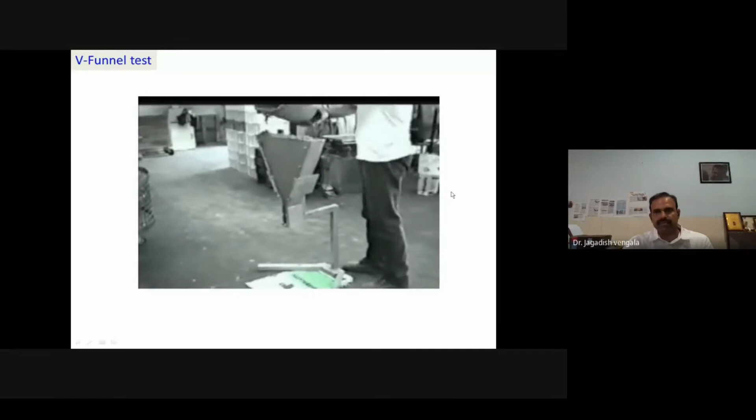So you fill the concrete with the V funnel, and you remove the bottom gate and measure the time, how much time it took. It should be 8 to 12 seconds. That's what you measure here in V funnel.

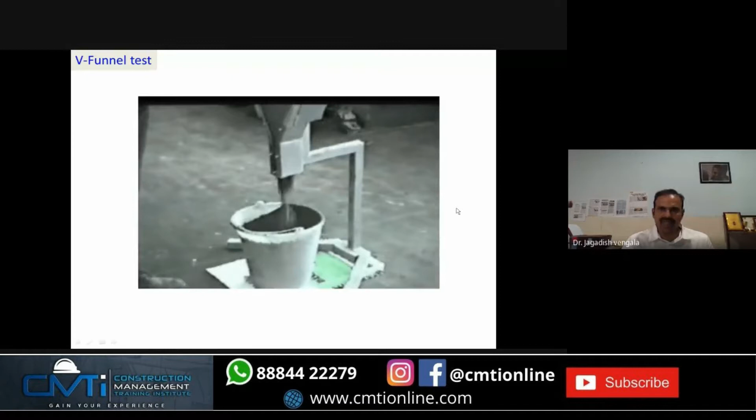Next is passing ability test using L box test. There are two boxes, one is vertical box and one is horizontal box. You measure the passing ability, you fill the vertical box with the SCC and then lift the gate, and it has to pass through the vertical reinforcement gate that is placed at the center of the vertical and horizontal box.

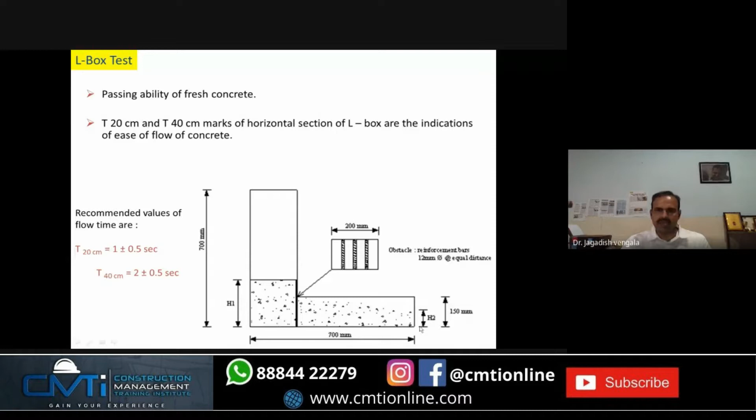It has to flow through the reinforcement, and you measure various things like time taken to reach 200 mm, time taken to reach 400 mm, and also the height difference H2 by H1, which gives the blocking ratio. So you fill the vertical box, lift the gate, and then it has to pass through the reinforcement.

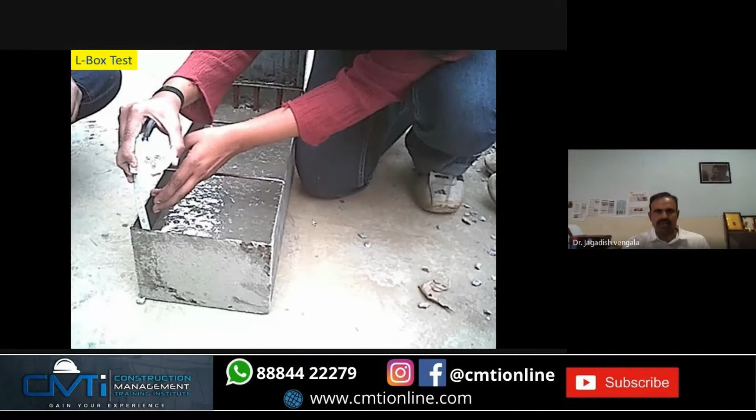There is an indication at 200 mm and 400 mm. You measure the times also, and also you measure the height difference between both the ends, H1 and H2. H2 by H1 we call it as a blocking ratio, the height differences, and it should be more than or equal to 0.8.

What does that mean? The height difference, it should generally be flat. Otherwise, the difference should be less. If it is less than 0.8, what does that mean? It is taking more time, or if the mix is stiff, it cannot reach the other end. So many things, and otherwise there is a blocking at the gate while passing through the reinforcement.

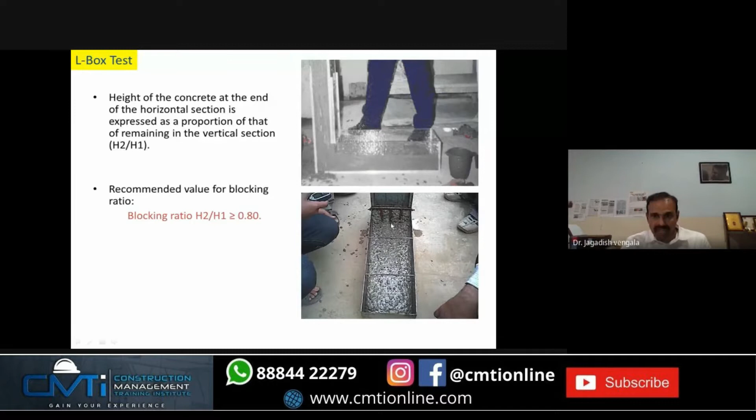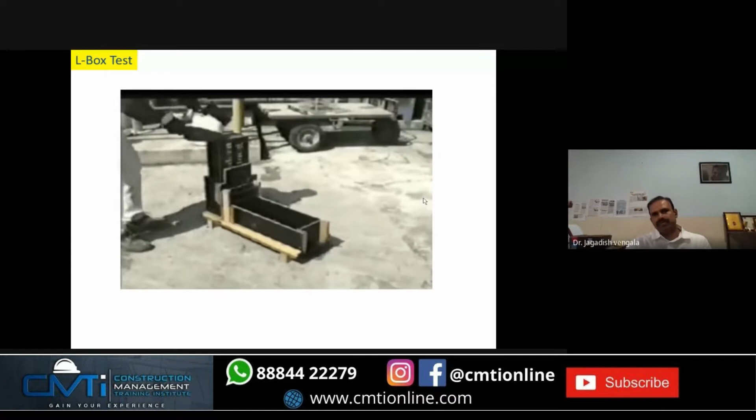So you're filling the vertical box, and there you're lifting the gate, and then you're measuring both ends, that end and this end. So the height difference H2 by H1 will give you the blocking ratio. It should be more than 0.8.

That's what. Next is U-box test. U-box test also, there is a U-box. So you have two channels, okay, two chambers, I can say, two limbs. And then one of the chambers, you fill it with concrete, and again, similar to L-box gate, you place the gate and you lift the gate. It has to pass through the reinforcement, and it has to come to the other end of the U-box.

The height difference between the first limb and second limb should be less than 30 mm. That means 3 centimeters.

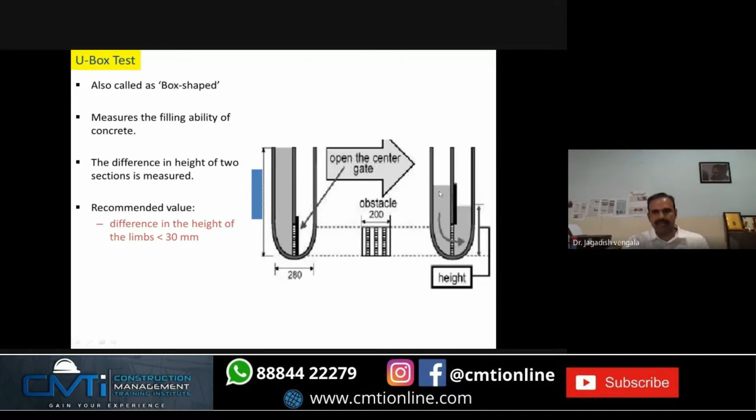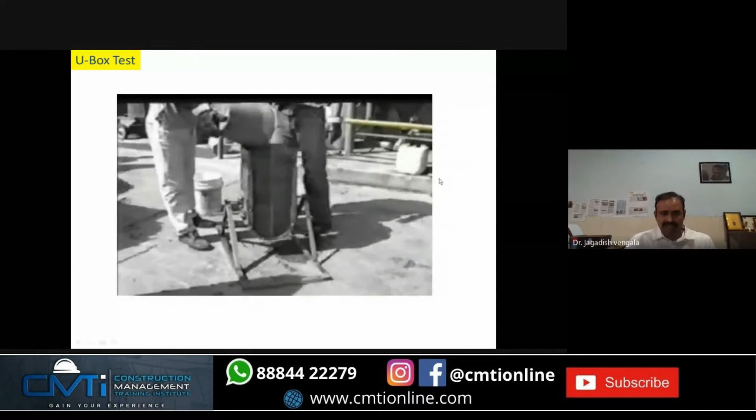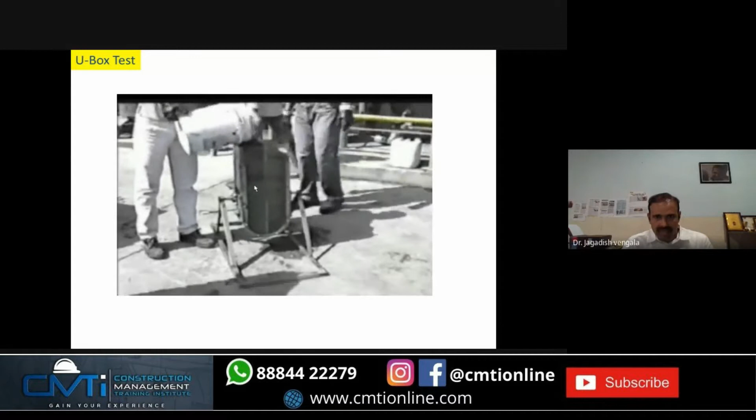These are the U-box dimensions. You can see one of the chambers is filling. You can see the concrete is rising. Concrete has come up to this. You can, by cursor, you can see, and then it slowly. So it has come up to this.

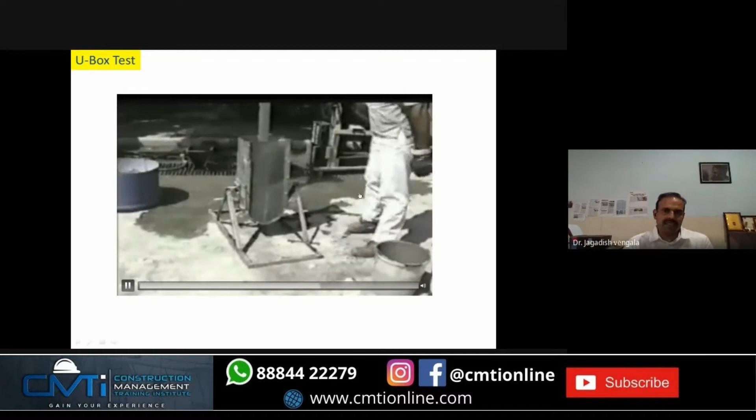Once it is completely poured in one side of the box, you will lift the middle gate, and then it comes to the other limb. So you will measure the height difference, this side and this side. This should be less than 3 centimeters or 30 mm. That is what you do.

And then there is a simple other test which is called J-ring test. J-ring test is a combination of, you have a ring, and then inside the ring you place the Abrams cone, and then you pour the concrete into Abrams cone. You lift the Abrams cone, and then the concrete flows through the J-ring.

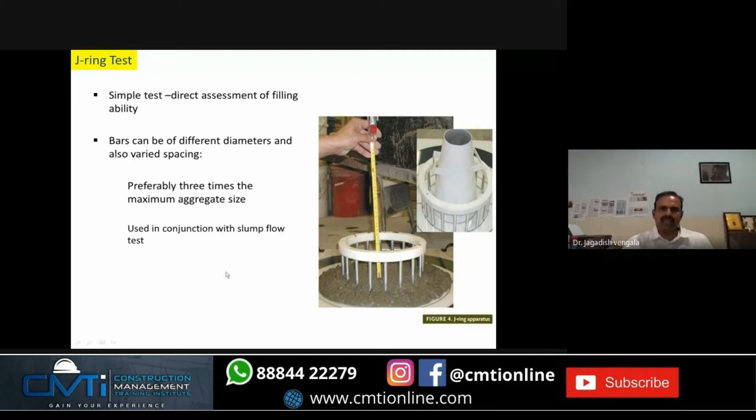And then what you measure is the height difference between outside and inside ring. It should be less than 10 mm. That means it should flow freely even after passing through reinforcement. So here also you measure the passing ability.

So you have a J-ring, and then you place the slump cone, fill the slump cone with self-compacting concrete, lift the cone, and then it has to pass through the J-ring. And you measure the inside height of the concrete and outside height. This should be less than 10 mm.

There is also fill box test. Initially, when we started, like in 2001, we actually fabricated one fill box and did the experiments. So here also there is a complex structure. If we have the fill box obstacles of 20 mm dia, and then you pour the concrete on one side, and it has to flow to the other end.

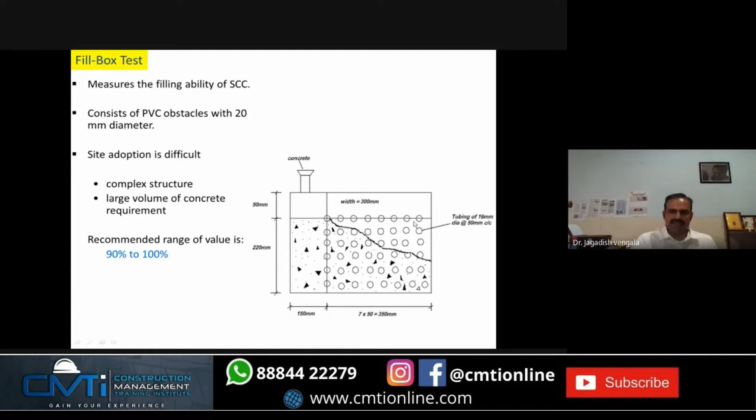You measure the filling area. The filling area should be 90 to 100%. There should not be any gap. That means it has to completely fill. So you can see here the experiment.

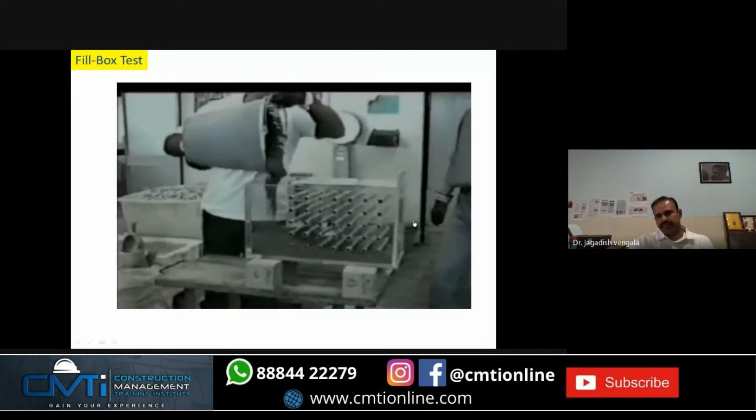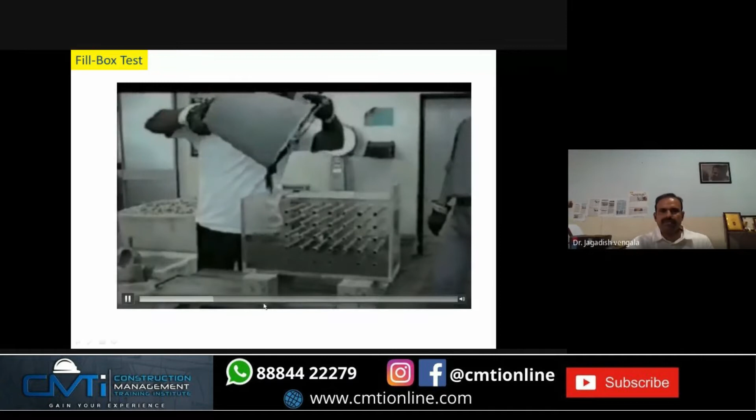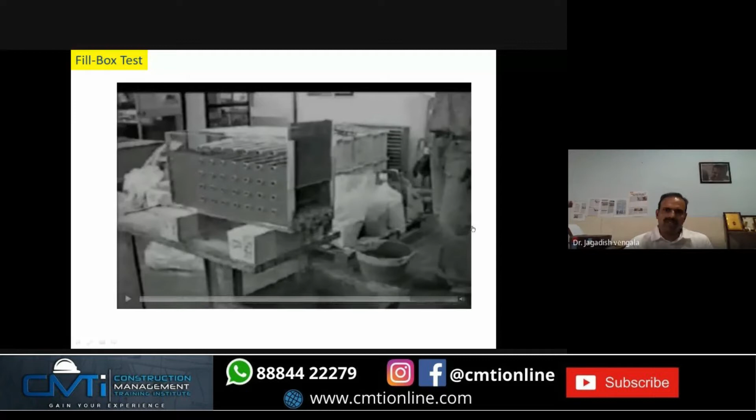So basically you're flowing, it is filling, almost 95% it is filling. What happens if your mix is not good, it gets blocked at the top, and then at the other end it will not come out. So this is what you measure - what we call filling, the filling ability.

The last test is called screen stability. This is a very simple test. You take 10 liters of concrete, keep it in a bucket for 15 minutes. Then you take the top 5 liters of the concrete and pour it through a 4.75 mm sieve, and sieve it. After 2 minutes, what happens is only the mortar passes through the 4.75 mm sieve, and you have the aggregate on your sieve. So you weigh the mortar sample. The percentage of mortar to the original concrete gives you the screen stability.

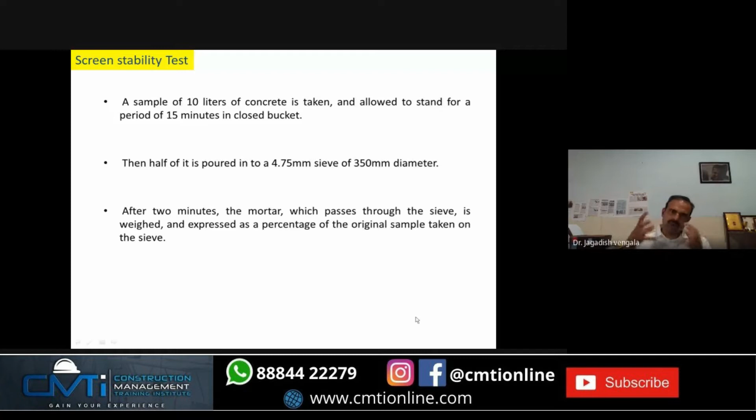What does that mean? If it is good concrete, when you keep it for 15 minutes, the aggregate should remain on the top layer. If it is not good concrete, all the coarse aggregate will settle down at the bottom of the bucket. So when you pick the top 5 liters, you'll have more mortar. That should not happen.

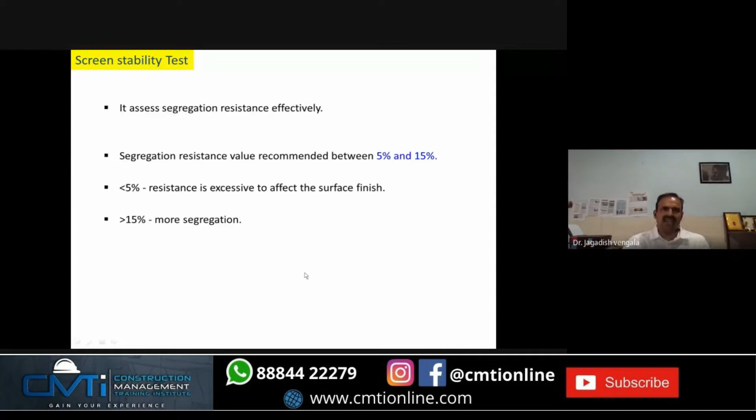So when you measure, the segregation resistance recommended values are between 5 to 15%. It should be less than 5% if it has excess resistance. More than 15% means more segregation. That's what the test tells you.

When you sum up all these tests: slump flow 600 to 800, T50 2 to 5 seconds, J-ring less than 10 mm, V-funnel 3 to 12 seconds, V-funnel T5 plus 3 seconds, L-box blocking ratio 0.8 to 1, U-box height difference less than 30 mm, fill box should fill 90 to 100%, and GTM screen stability test between 5 to 15%.

How can you do all the tests? For acceptance of SCC, you can do at least 3 combinations of tests. The Japanese combination: slump flow, V-funnel, U-box. Sweden: slump flow and L-box. Europeans do J-ring and U-box. And slump flow, either U-box or L-box, plus V-funnel 5 minutes. This we found better, based on our experiments.

I'll quickly run through because I have another 15-20 minutes, maybe 15 minutes. I'll quickly run through - a lot of things are there I wanted to share.

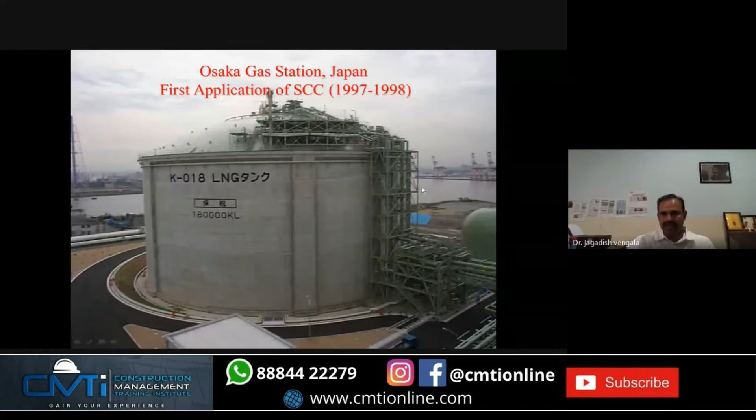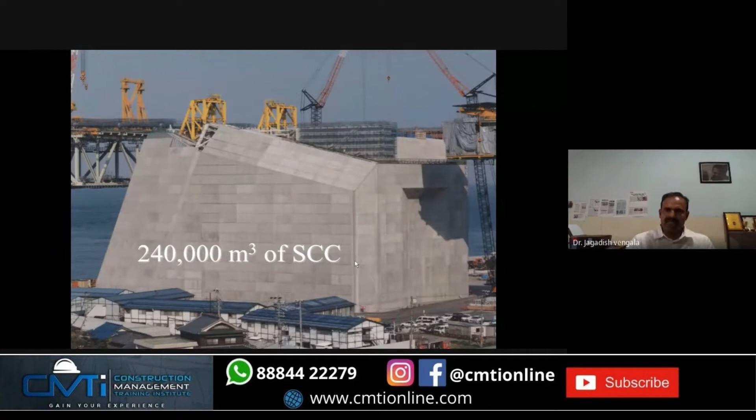This is the Akashi Kaikyo Strait Bridge, opened in 1998, connecting two islands of Japan. As part of my research work, I visited Japan in 2009 for one of the world's largest earthquake tests on a shake table. This is one of the piers on one side of the island. Here they poured 240,000 cubic meters of completely SCC. These are my pictures from when I visited in 2009 - I made a point to visit this place, along with my Japanese and US friends. This is the Akashi Kaikyo Strait Bridge.

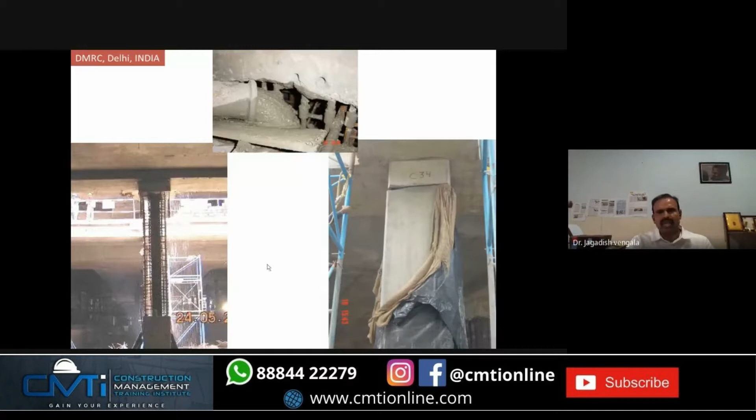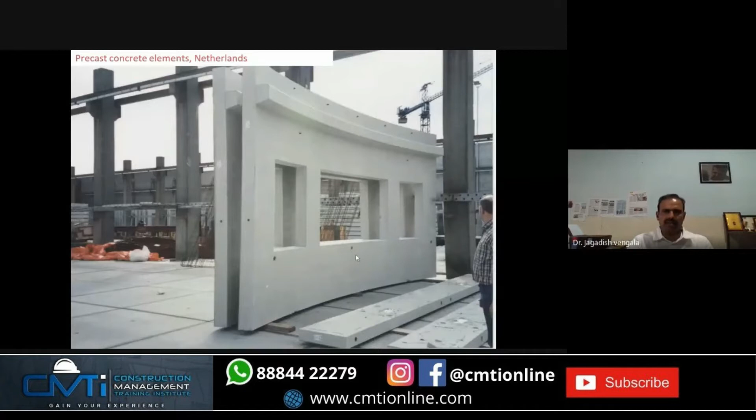In Netherlands, some precast concrete elements show a very interesting application. Concrete is poured, and once it gets cured, these elements are lifted and you can shift them to some other place. These are precast concrete elements made using self-compacting concrete.

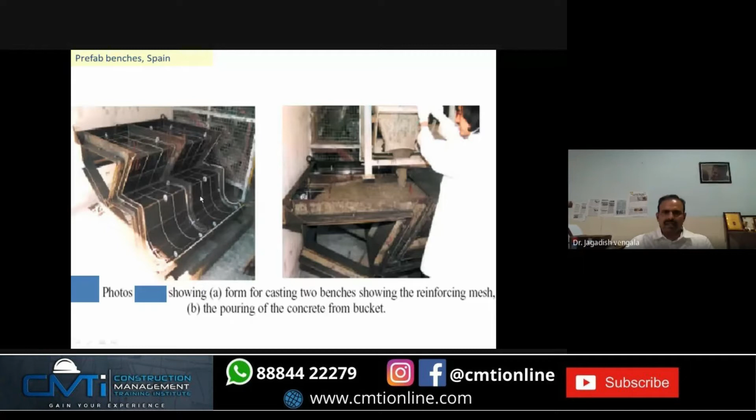This is a very interesting application in Spain by Ravindra Gettu from IIT Chennai. When he was at the University of Catalonia, Spain, he made some precast benches, some of the applications. I tried one myself, and at the end I'll tell you about one of my BTech students' project experience.

Coming to the mix design, I'll give you a small glimpse quickly, running through two methods. One is the method we developed, and the other is the Japanese method suggested by Okamura et al. in 1993, the first method that came from the University of Tokyo, Japan.

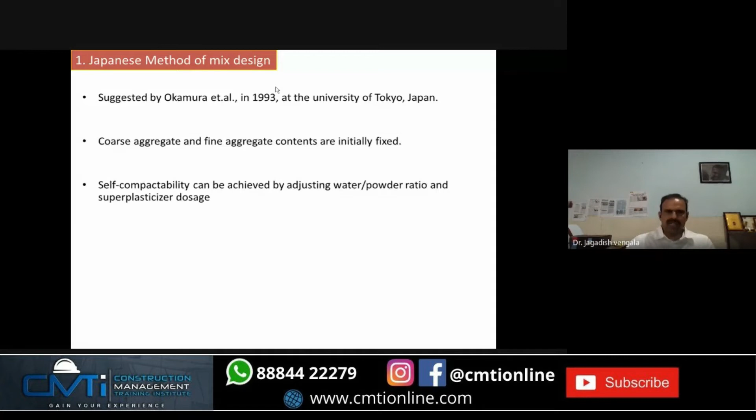In this method, you first fix the coarse and fine aggregates. By adjusting the water to powder ratio and the superplasticizer dosage, you achieve self-compactability.

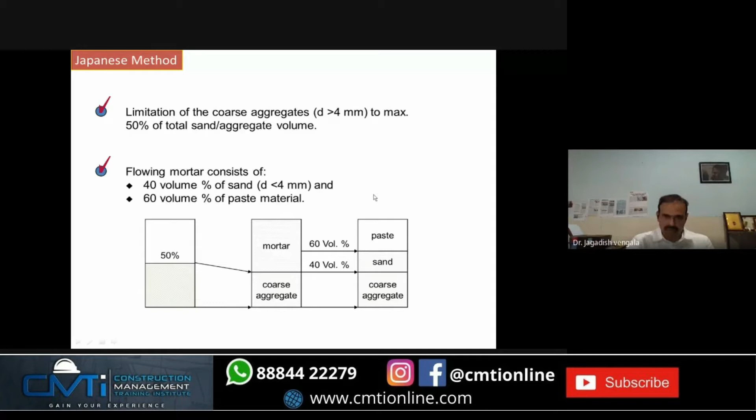So in this method, you decide the air content, which depends on factors like 2% or 1%, and then you fix the coarse aggregate at around 50 to 60%.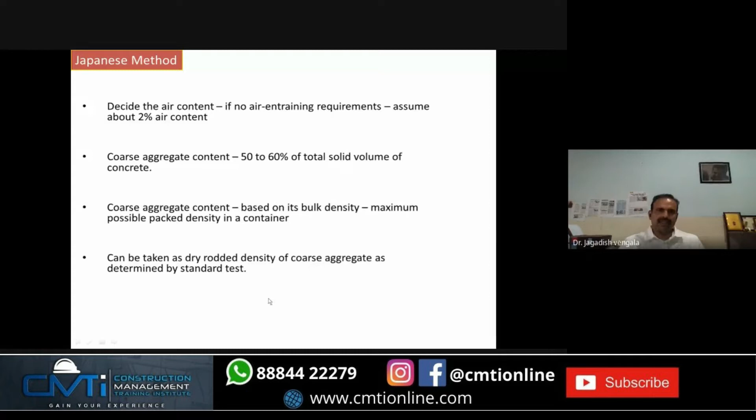You measure the coarse aggregate bulk density and the dry rodded density. This is how we measure the dry rodded density of coarse aggregate: place it in 3 layers, 25 strokes each layer. That gives you the dry rodded packed density of the coarse aggregate, which you use for calculations.

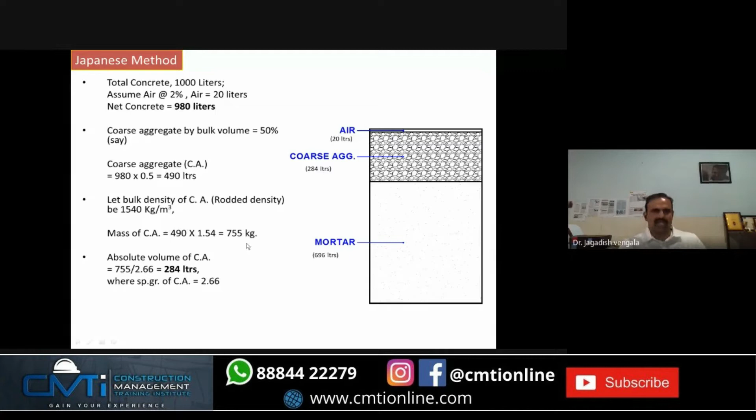For example, if you take 1,000 liters of concrete and assume 2% is air, you remove 20 liters, leaving 980 liters to design. If you assume 50% as coarse aggregate, that's 490 liters of the 980. Multiplying by bulk density gives you the mass, and from there you can calculate the absolute volume.

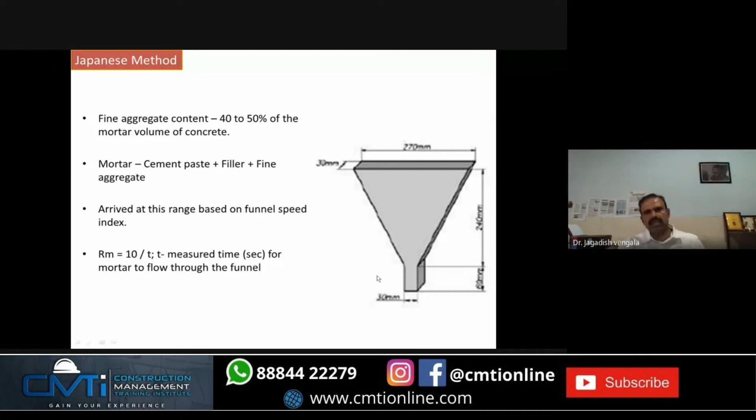For fine aggregate, using the small V-funnel, you actually get the fine aggregate content. This is the small V-funnel, and we do mortar trials to get the required mortar quantity.

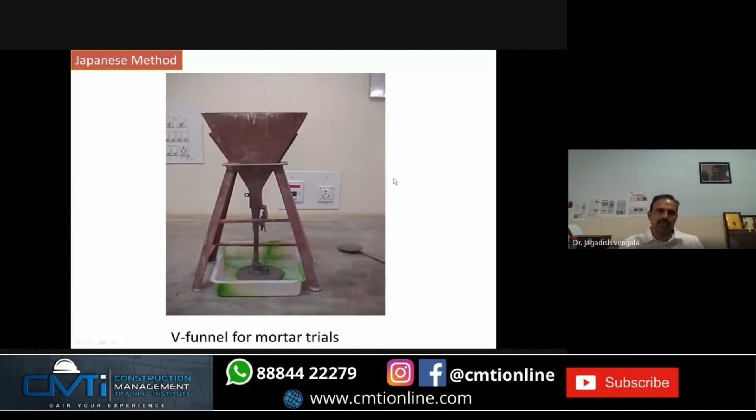So if the volume of coarse aggregate is, say, 284, you deduct that from 980, then take 40% as fine aggregate. That's basically how the method works. I'm not giving too much importance here because this is the complete mix design part of it.

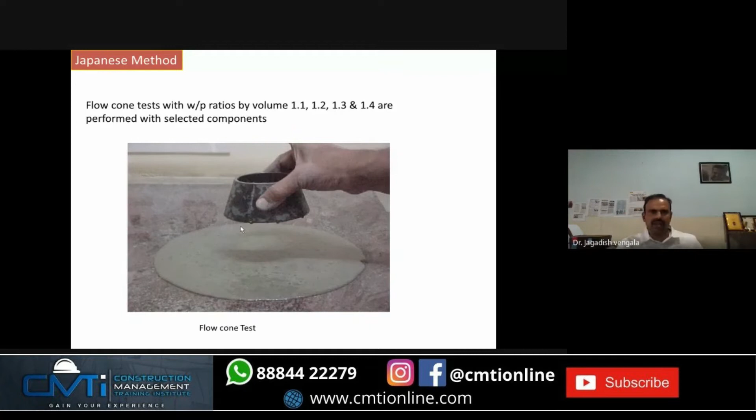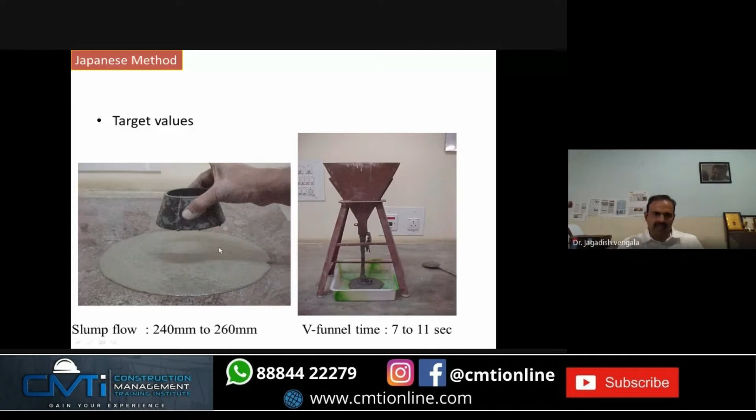Using the flow test, you measure the water to powder ratio needed, and based on that you decide the water powder ratio. Based on the V-funnel and flow cone tests, you decide the mortar proportion. Then superplasticizer is added, and you run the regular slump flow and other tests for concrete. I'm not giving much detail since it's a detailed explanation of the mix design—I've just given a glimpse of the Japanese method.

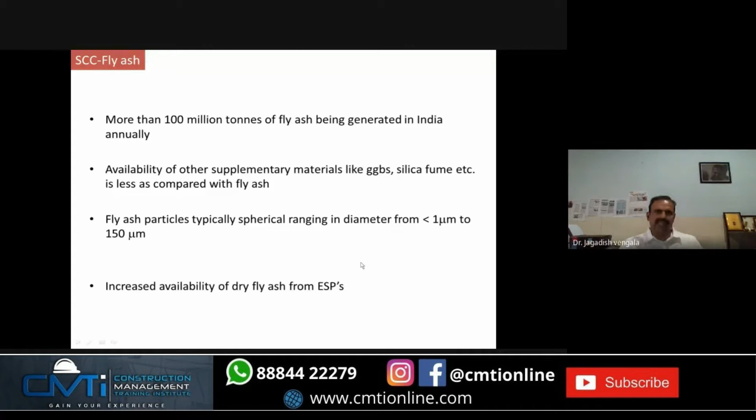Now I'll take up one more topic: how do you make SCC using fly ash as the cementitious material? We know that large amounts of fly ash are generated from thermal power plants, and fly ash particles are spherical in nature with a smooth, glassy surface, giving a ball bearing effect.

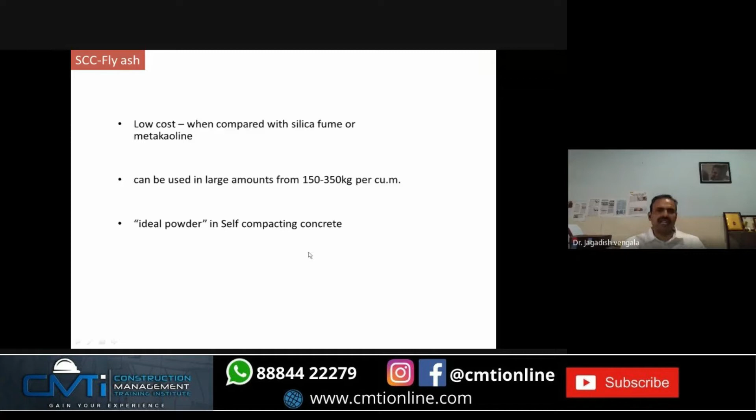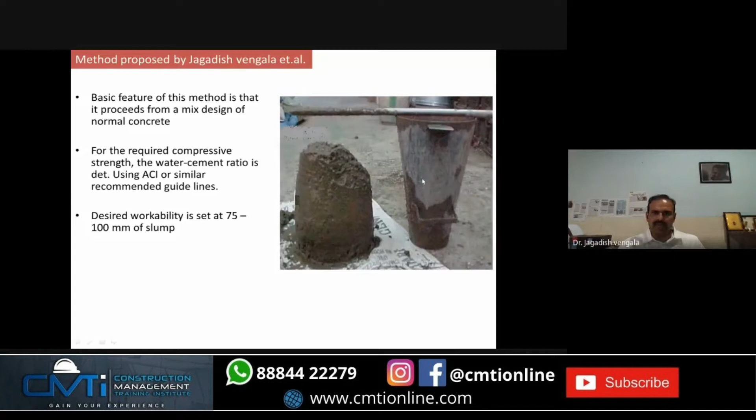In my method, like a normal mix design, once you achieve a workability of 75 to 100 for normal concrete, since normal concrete has more coarse aggregate, you replace the coarse aggregate using fly ash in various percentages—5, 10, 15—and slowly achieve self-compacting concrete. Replacing coarse aggregate with fly ash or other cementitious material gives flow to the concrete.

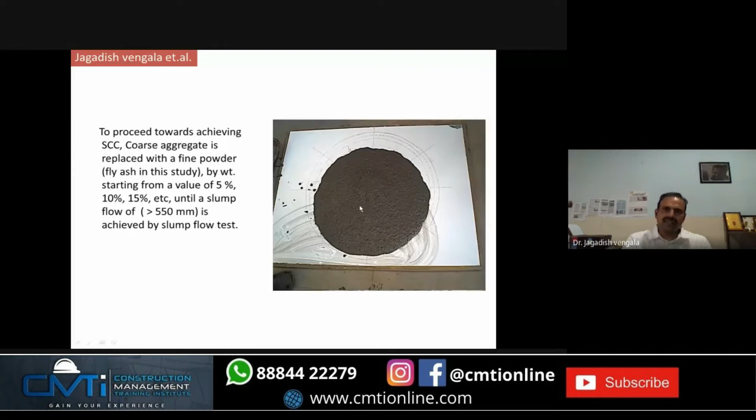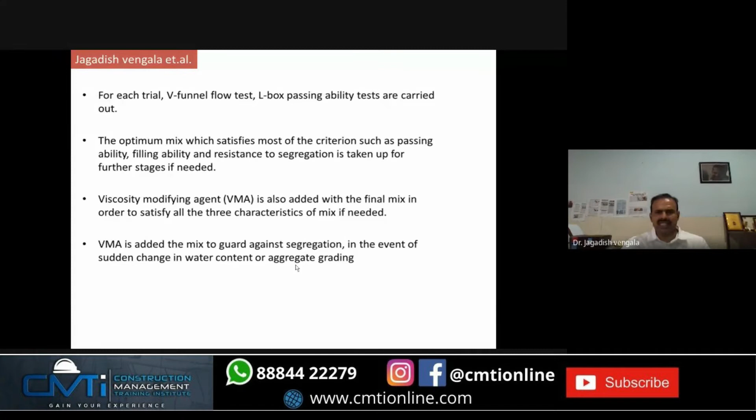At the same time, you have to conduct other tests like V-funnel, L-box, and others. VMA actually guards against segregation, since we usually observe changes in water content due to aggregate moisture and other problems, including grading issues.

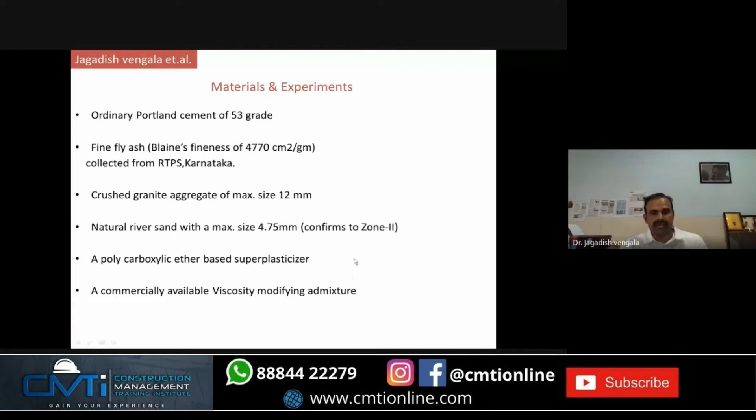For our experiments in 2001, we used OPC along with fly ash collected from Raichur Thermal Power Station, 12mm aggregates, and natural river sand. At that time it was natural river sand, though now sites use crushed rock fines or other alternatives. We used PCE-based superplasticizer and a VMA. So these are the mixes you can see here.

Very interesting study, why fly ash. We have actually measured 270-day strength also, that means after 9 months, we measured the fly ash contribution to the 28 days to 270 days strength.

You can see here for a replacement of 37% fly ash, comparing normal concrete to the 270 days normal concrete, there is an increase of 90 MPa. If 55 is your 28 days strength, 90 MPa is at 270 days. That's the long-term contribution of fly ash to long-term strength concrete.

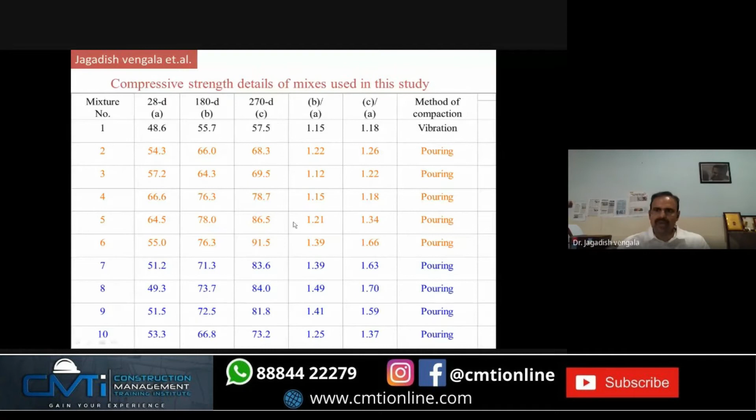So a very interesting point to note is when you're pouring, when you make the mix, you should not vibrate. Even if you're doing trials at your college, when pouring the concrete, you just have to pour. You need not vibrate because it is SCC.

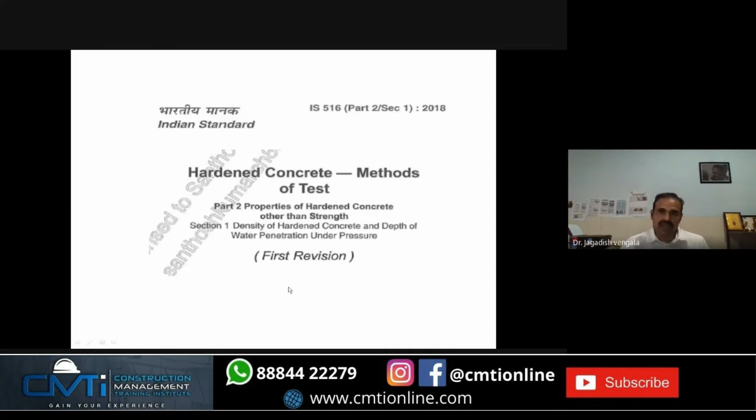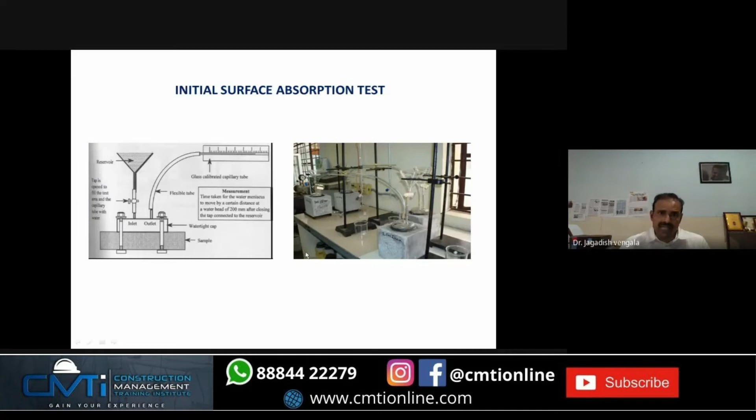Hardened properties, yes, it gives almost equal properties to normal concrete. Very interesting, IS 516 2018 has added new tests other than the strength tests: water penetration test, initial surface absorption test, a very important test, and RCPT test. These are the three very, very important tests when making SCC.

SCC is usually made for tall structures and other applications, particularly high strength applications also. When making these, these three tests are mandatory, as mandated by IS 16700 2017, criteria for structural safety of tall concrete buildings.

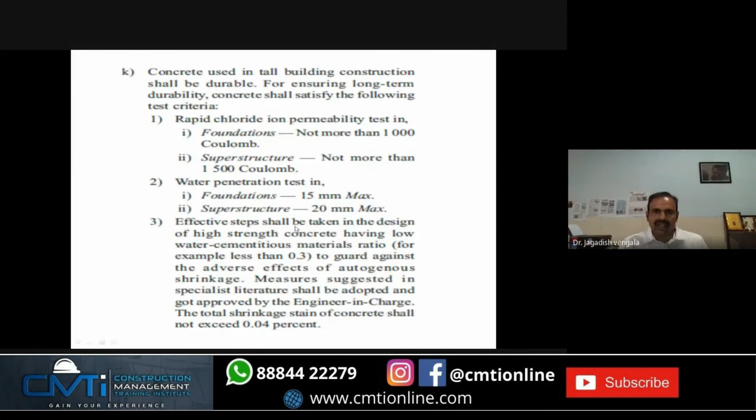When making concrete for these buildings, the rapid chloride RCPT value should not be more than 1000 coulombs for foundation, and not more than 1500 for superstructure. Water penetration test maximum is 15 mm for foundation, 20 mm for superstructure, and shrinkage strain value and other values are given in this particular code.

Here I would like to show some of the values. As per ASTM, more than 4000 is high chloride permeability, and low chloride permeability is 1000 to 2000.

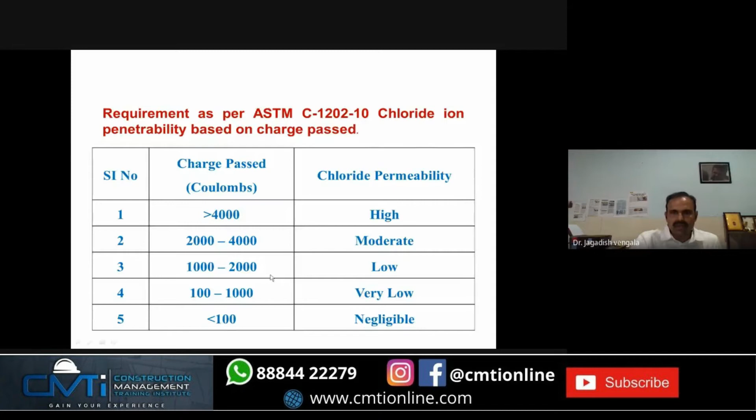Coming to the cementitious materials, how much do we have to add? This recent IS 10262 2019 gives the percentage of cementitious materials. Earlier, there was no mention of adding cementitious materials to the concrete.

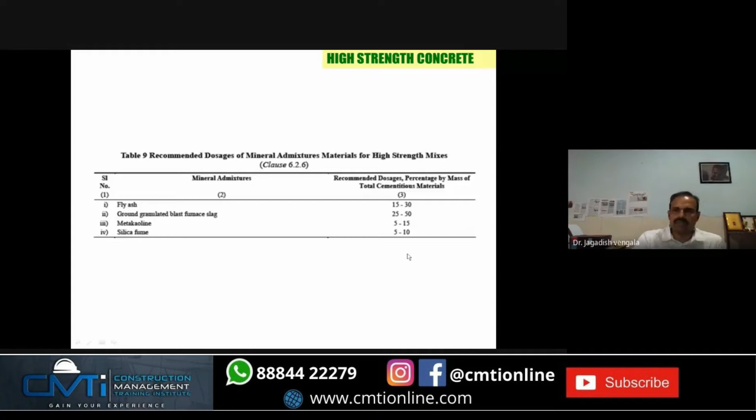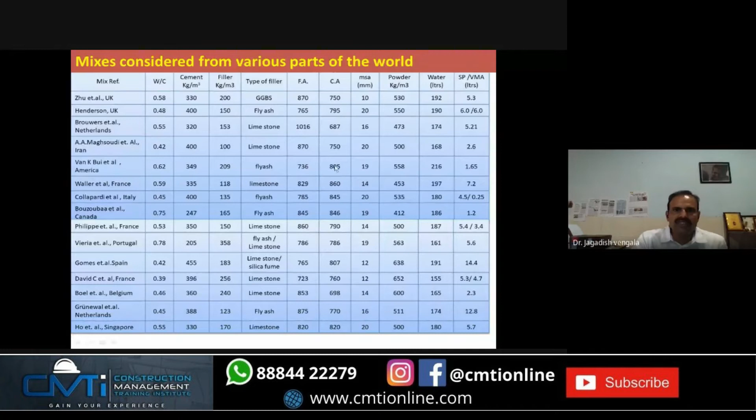Coming almost to the end of my presentation, I would like to give you the importance of volume fractions, particularly in self-compacting concrete. When we considered various mixes from around the world using different fillers, the interesting thing is volume fractions. Volume fraction is particularly about paste, how much paste is required to maintain the flowability of the concrete and to maintain homogeneity in the concrete, which is very, very important.

Paste is a combination of cement plus cementitious material plus water, we call it a paste. In normal concrete, the volume of paste is around 23 to 29%. But in case of SCC, you can see here it's 35 to 41%. More paste is required in case of SCC.

So we have come to a conclusion that, particularly all over the world, the volume of paste is generally between 0.35 to 0.41 in other places. But when it comes to Indian researchers and Indian cases, you can see the paste content is between 0.37 to 0.46. We need more paste because of our grading of aggregates, since you don't get well-graded aggregates if there is a change. So we require more paste due to various reasons.

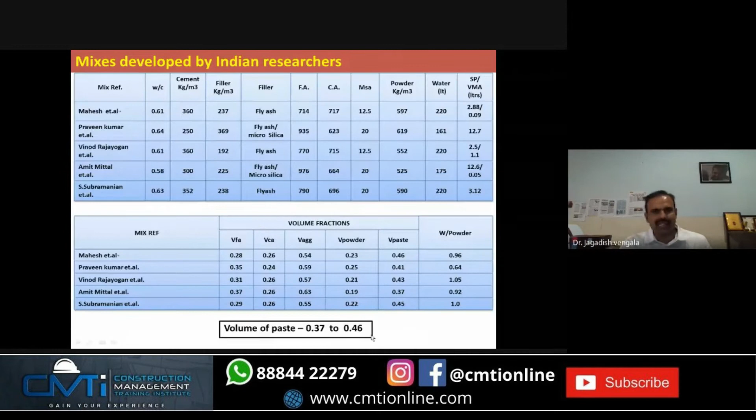SCC mix requires nearly 40% of paste volume. In case of Indian researchers, you can see it requires 0.4 and above, 40 and above. This is due to angular crushed aggregates, or otherwise, if you want to avoid viscosity modifying admixture, you need to put more paste into the system.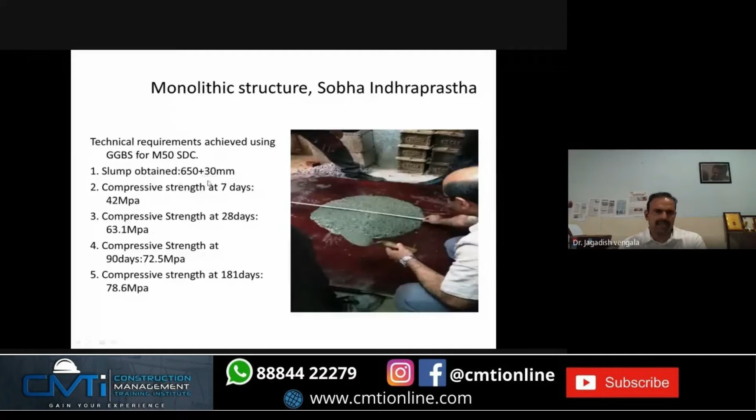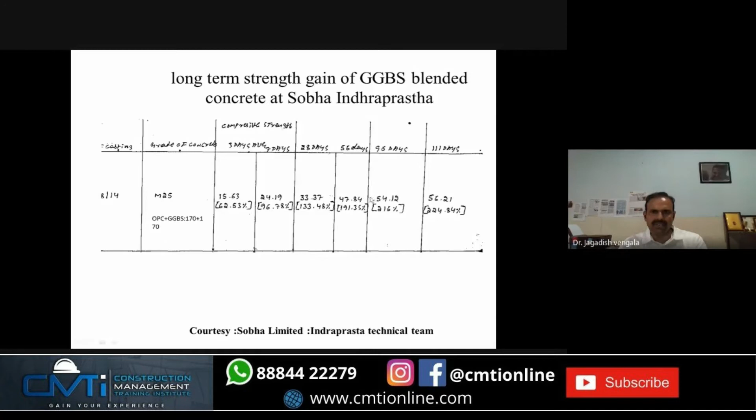With GGBS, this is the Sobha Indhraprastha building. I've taken it from our JSW friends, wherein slump is around 650 to 650 plus or minus 30 mm, and compressive strength is around 63. This is the site chart I just showed you, M25 grade. Normal cement OPC is 170 and GGBS is 170. This is the 50 MPa we got for 95 days, 111 days.

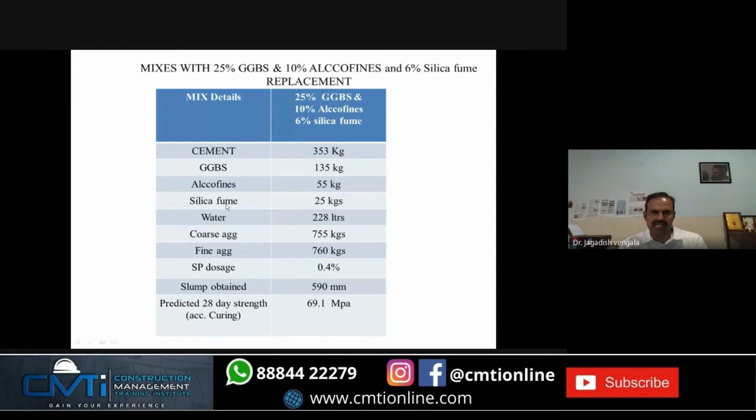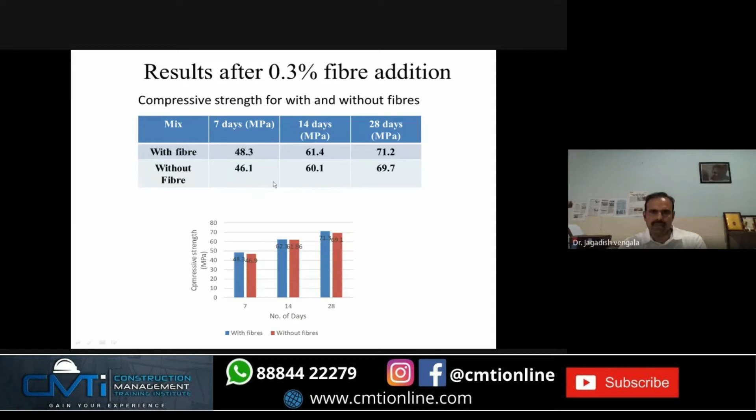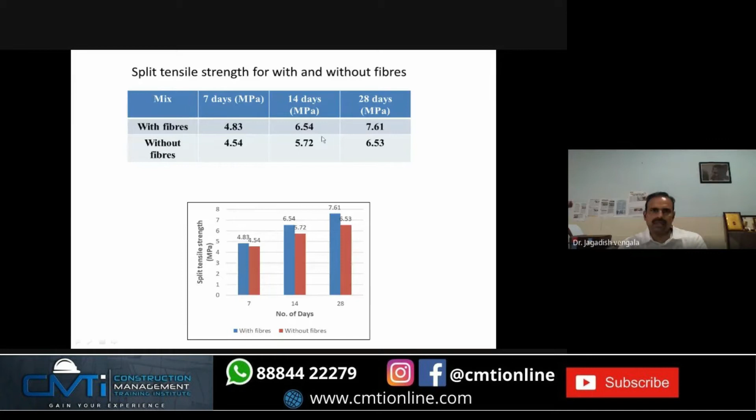This is the last one, I come to the last part. Quickly, I'll run through - we made a precast bamboo reinforced furniture element using SCC. We collected the anthropometric data, and based on that data, we finalized the bench, a park bench. We designed SCC for M25 grade, and used bamboo as reinforcement. We prepared the molds, tied the bamboo, casted the slabs, and finally assembled and tested these benches.

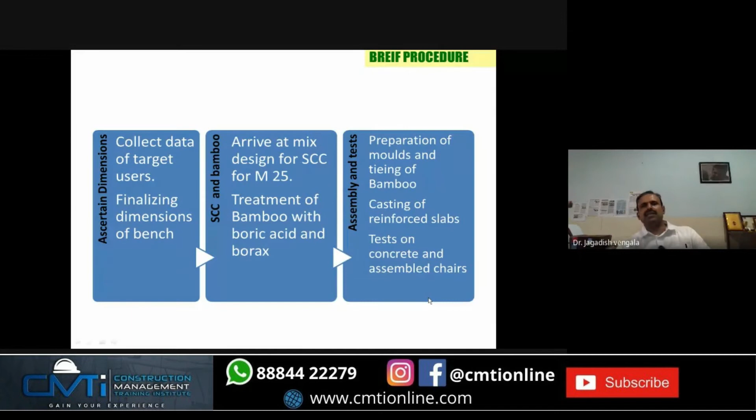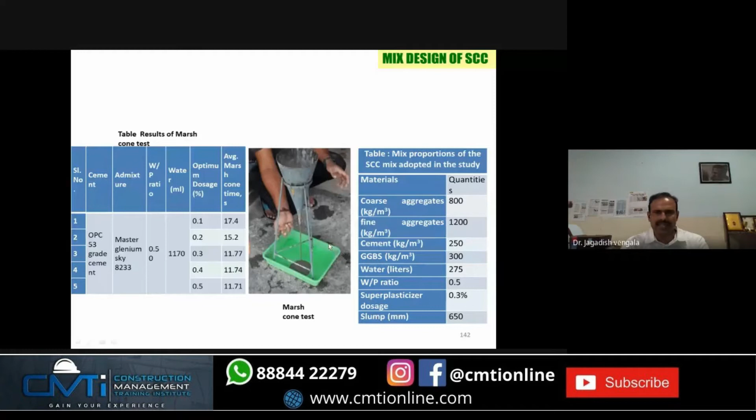And then accelerated curing test we have done because we cannot wait - particularly BTech projects are 3 months, 4 months. When you start the work, you just have to find out the next day how you measure the strength, the projected 28 day strength using accelerated curing test. You know the procedure, right?

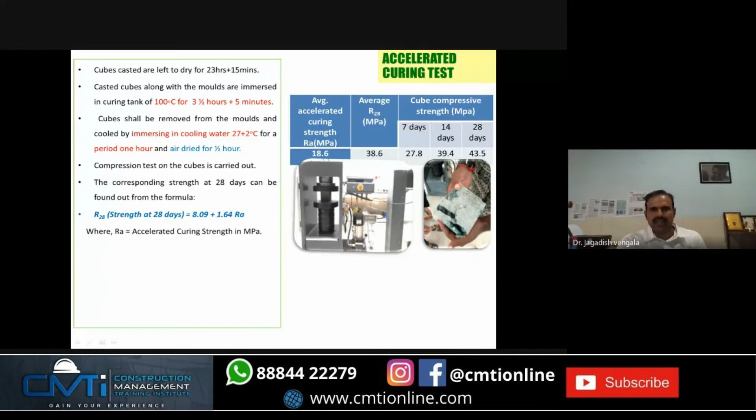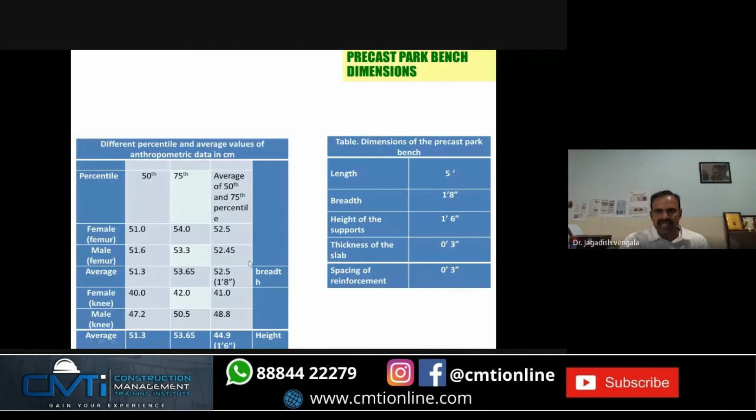This is the ergonomic data of the various people we have taken. Based on that, this is the shin length, femur length and knee length. Based on that, we have taken the width of the bench and then the height of the bench. Based on the 50th and 75th percentiles, we have decided the park bench dimensions based on the data.

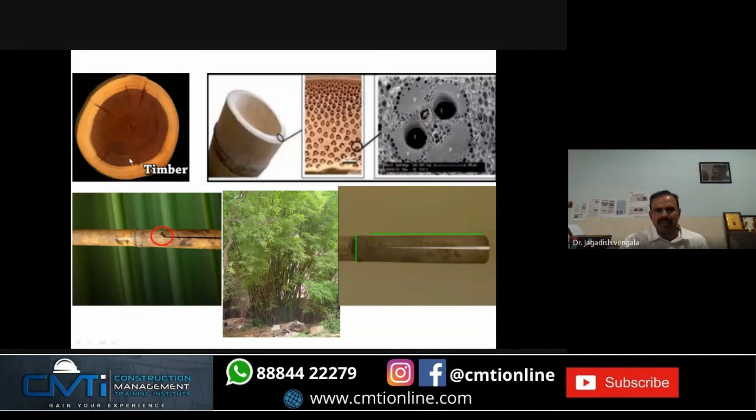So bamboo is used as reinforcement. Bamboo comes under grass, and when you compare it with timber, it has different properties. Like in timber, you have radial fibers, but here you have fibers which are oriented in the axial direction. So you split it and then treat it, because as a reinforcement we have treated the bamboo.

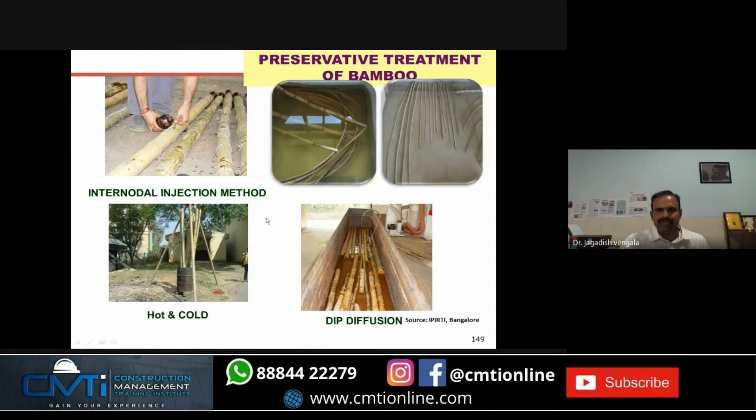We then did the deflection test for these benches. It comes within the limits, because if you take a 4-person load of 400 kgs, we have gone up to 720 kgs, and over a period of time, the deflection is minute, till 4 mm. Anyway, that never happens.

A percentage of cost comparison shows an 18% profit when it comes to bamboo reinforcement, and normal concrete versus self-compacting concrete.

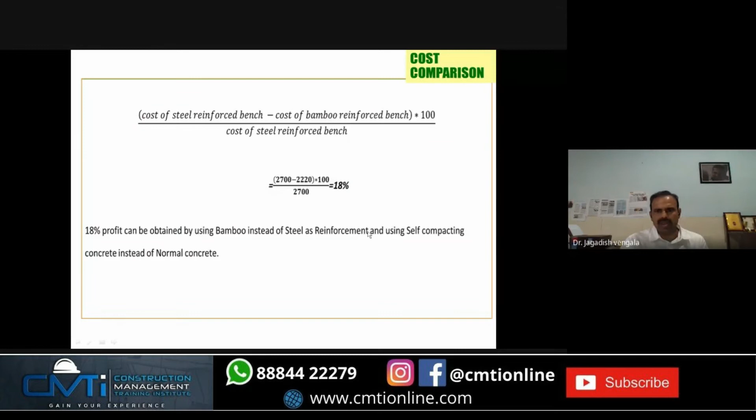Finally, coming to the end of my presentation, it's definitely a choice for complex structures, and you can arrive at SCC with any of the methods. But paste content is very important—you're likely to have 38 to 45% paste content. Coarse and fine aggregate are either equal, or sometimes coarse aggregate is lower. All methods need guidelines, laboratory tests, and field trials; this is very important. You can't just go and cast it on site. You first have to do the laboratory trial, and that's why generally for good structures, they first give the testing, then based on the test results of the mix constituents, they design the mix, then do the trials, and then give it to the field. They conduct the field trial, and then finally the application.